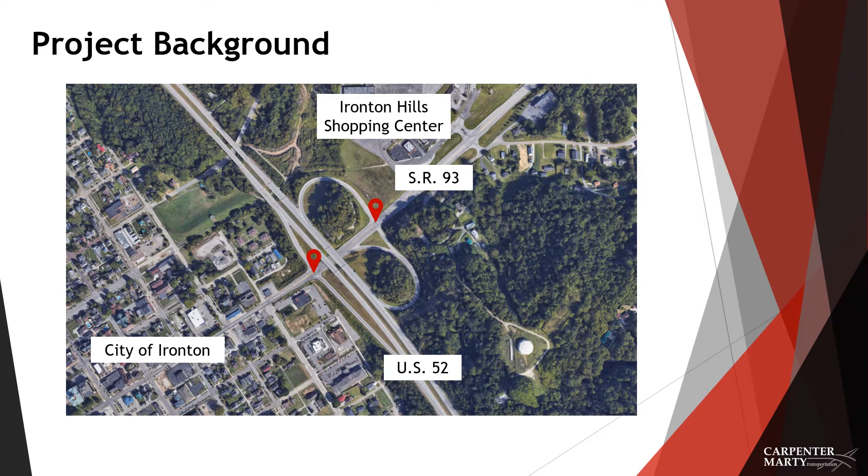Both ramp terminal intersections have experienced a high number of rear-end crashes on southbound State Route 93. The location was ranked 45th on the ODOT 2017 Highway Safety Improvement Program Suburban Intersection List and was on the 2019 Governor's Top 150 Safety Location list in the state of Ohio.

ODOT District 9 completed a safety study in 2019 to evaluate the crash trends and develop potential countermeasures to improve safety at the intersections. The short-term countermeasure was to conduct a feasibility study to analyze the viability of the medium and long-term countermeasures. The results of that feasibility study are contained herein.

The Park Avenue traffic study was developed in 2017 for the Kentucky-Ohio-West Virginia Interstate Planning Commission, KYOVA. This study area includes Park Avenue from 6th Street to the US 52 westbound ramp intersection. The purpose of this study was to improve traffic safety and operations in the corridor.

Recommended improvements included roadway resurfacing, signal timing improvements, installation of pedestrian facilities, including signal heads, push buttons, and curb ramps at traffic signals, and addition of new sidewalk on the north side of State Route 93 from 9th Street to Coreyville Road, and mast arm lane use signs at the interchange with US 52.

The traffic and safety study for US 52 and State Route 7 was developed in 2007 for KYOVA to assess mobility and safety conditions along the US 52 State Route 7 corridor through Lawrence County. Recommended improvements included upgrading existing signals and adding warning signage.

KYOVA is currently updating the 2007 study, and a US 52 State Route 7 corridor safety management plan is being developed to evaluate the current and projected needs of Lawrence County within this transportation corridor. Information about the KYOVA study will be discussed later in this presentation.

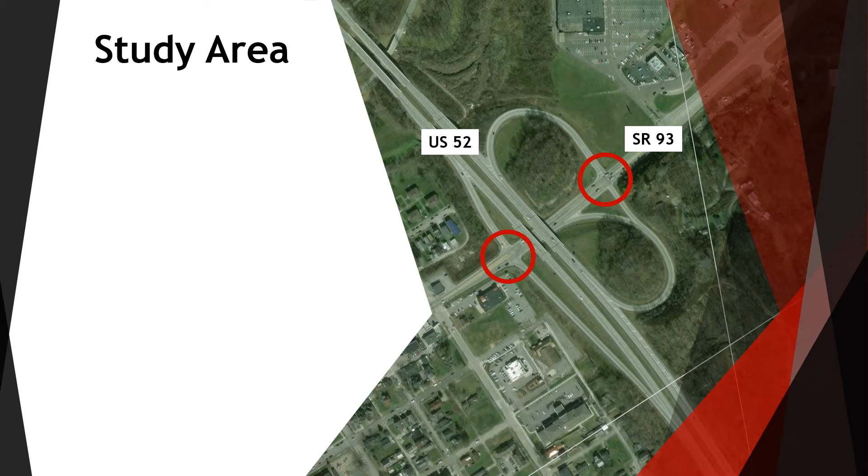Crash data between 2013 and 2017 was provided by ODOT District 9 in addition to crashes identified within the ODOT Transportation Information Mapping System. A total number of 92 crashes were identified and further narrowed down to 64 crashes within the study area. Of those crashes occurring in the study area, 21, or 33%, involved an injury. The amount of rear-end and injury crashes at this location both exceed statewide averages for similar intersections.

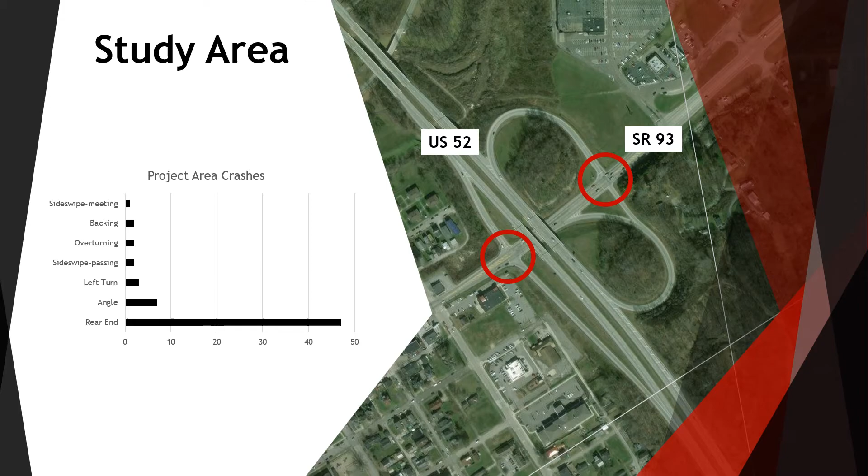The ramp terminal intersections experience rear-end crashes twice as often as statewide average, which indicates a problem. Approximately 47% of the crashes occur between 3 and 7 p.m., indicating congestion may be a contributing factor. Following too closely is the most cited contributing factor, again indicating congestion may be a problem.

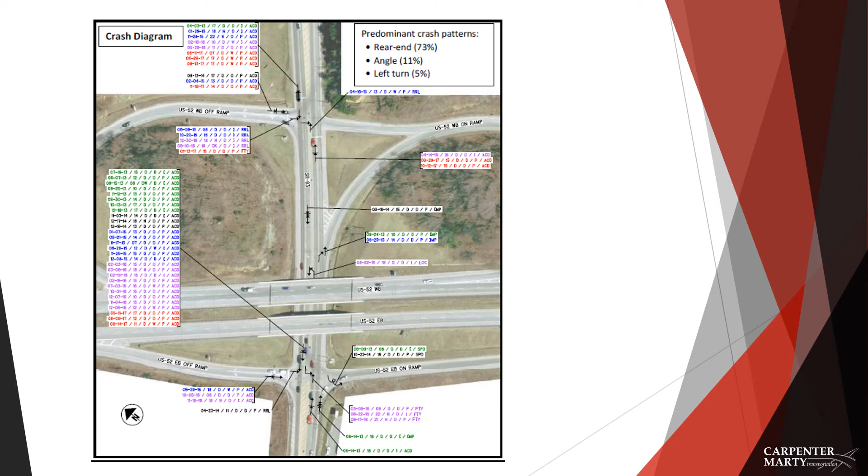The crash statistics show over 84% of the crashes occurred on dry pavement with no adverse weather conditions, which indicates weather is not a contributing factor. Almost 85% of the crashes occurred during daylight, which suggests lighting at the intersection is adequate.

The purpose of this project is to further evaluate the feasibility of the medium and long-term countermeasures identified in the 2019 safety study. The study identified two alternatives. Alternative 1, identified as the medium-term countermeasure, would construct full signal upgrades at the two existing signalized ramp terminal intersections. Improvements would include mast arm configurations, signal heads with backplates, a supplemental southbound signal head at a height which can be seen from the north side of the overhead bridges, and optimization of signal timing, coordination, and detection.

Alternative 2 represents the long-term countermeasure and consists of converting the two signalized intersections into single-lane roundabouts. The safety study identified the use of roundabouts as a feasible option to improve safety and operational service at the intersections, but recommended further investigation to more accurately determine the impacts and costs, especially for the eastbound or southerly intersection, due to the proximity of the steeply graded slopes on the south side of the roadway.

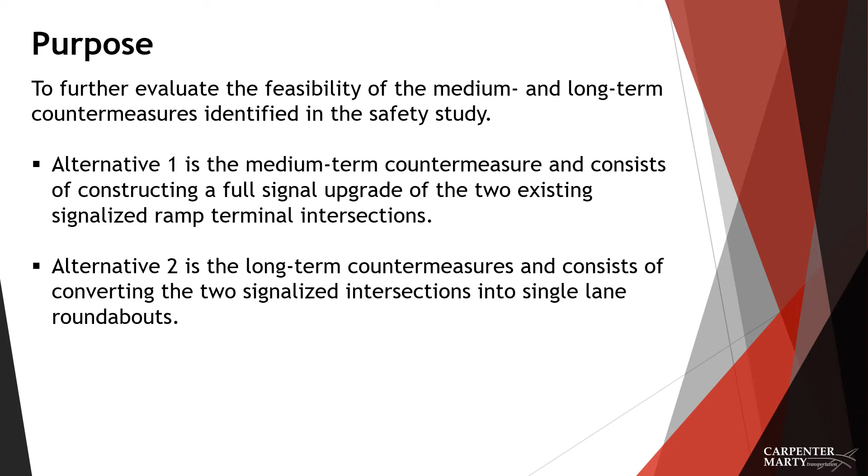To begin our analysis, AM and PM peak turning movement counts were analyzed for both intersections. Count data was collected in August of 2018. AM and PM existing year 2018 and design year 2038 volumes were used for all traffic analysis. The district provided the linear annual growth rates to project the 2018 data to 2038 volumes. The design year 2038 volumes are expected to be conservative since the population of Ironton has been decreasing since 1950.

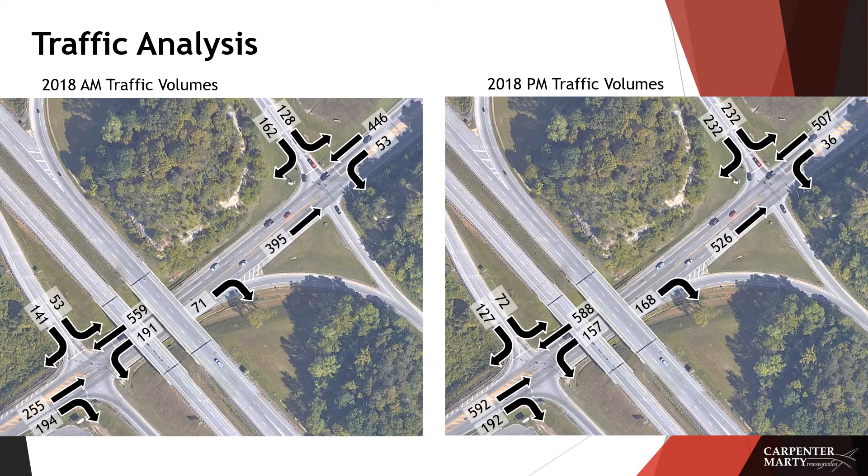The City of Ironton discussed the possibility of a large future development north of the existing interchange. No specific details or traffic impact studies are currently available. For this reason, site traffic was not included in any analysis.

Our project team completed a traffic capacity analysis for the existing conditions as well as both proposed conditions, alternatives 1 and 2. Specialized traffic software was used for all three conditions. The numbers in the chart indicate the expected period of delay for the average vehicle measured in seconds.

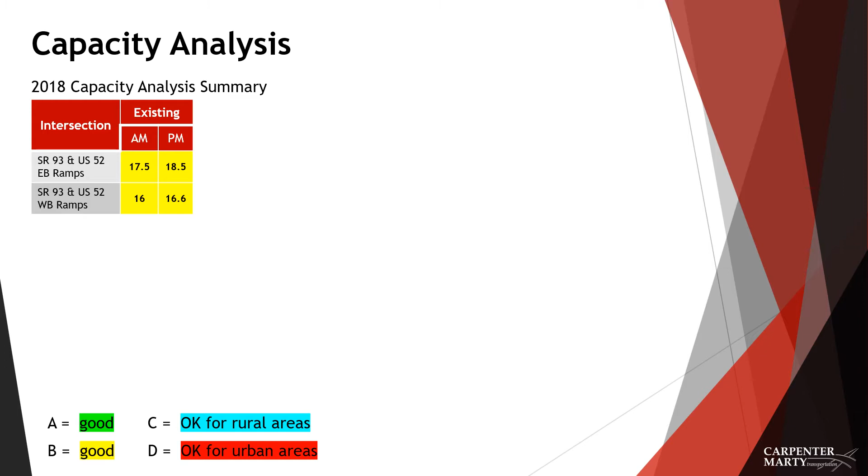The 2018 capacity analysis summary, identified as the existing year, indicates for all AM and PM peak periods the existing intersection and those for alternative 1, which would provide traffic signal upgrades, perform at a level of service B, which is considered good or acceptable. For alternative 2, which would construct the roundabouts, the intersection delays decrease.

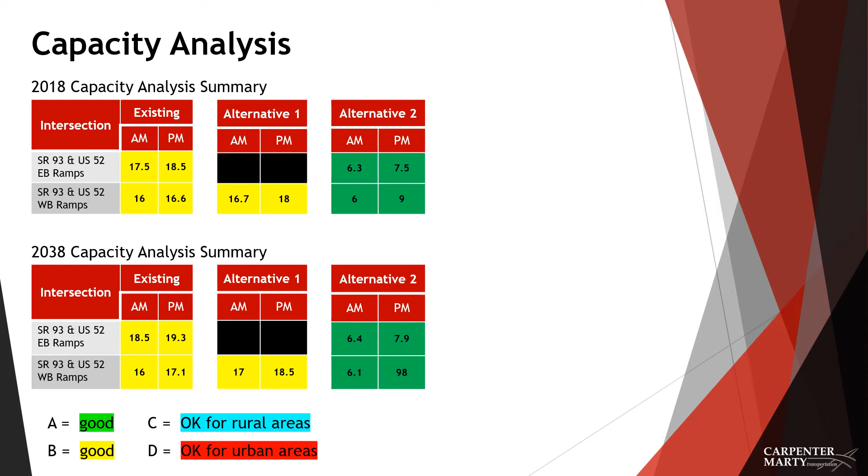The 2038 capacity analysis summary, identified as the horizon or design year, still indicates the existing and alternative 1 configurations function at an acceptable or good level. Alternative 2 shows a decrease in delay for the 2038 analysis.

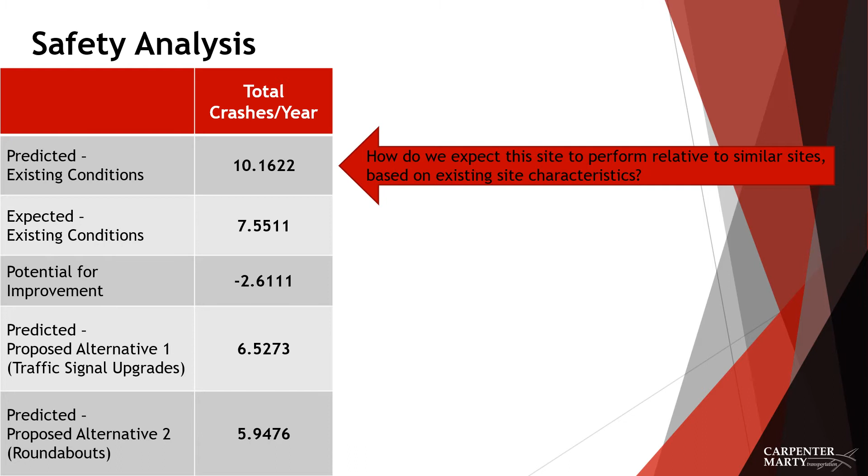Using industry standards, our team reviewed the different alternatives to determine the potential for safety improvements. The existing conditions' predicted crashes show how we would expect the site to perform relative to similar sites, based on existing site characteristics. The existing conditions' expected crashes shows how we expect the site to perform based on actual crash history. Then, we determined if there is a potential for improvement by determining the difference between the expected and predicted crashes. Since predicted crashes is greater than expected crashes, this indicates this site experiences fewer crashes compared to its peers.

This is then compared to the proposed alternatives to determine how those projects will compare to the existing conditions. Both projects will result in fewer crashes compared to existing conditions. Alternative 2, which is the roundabouts, will result in fewer crashes compared to alternative 1, which is the traffic signal upgrades. This is seen across the transportation industry, as roundabouts, in addition to having lower approach speeds, have fewer conflict points than traditional intersections.

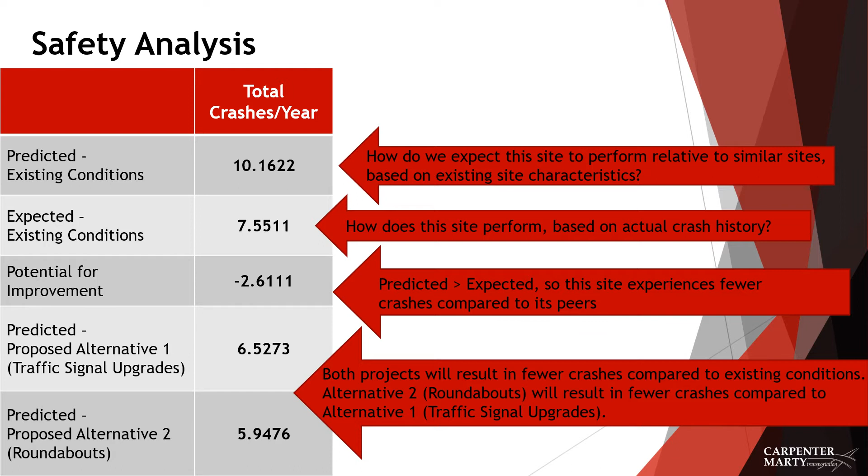Once our team determined that alternative 2 was a feasible solution in terms of safety improvements, we investigated the challenges with the design and ultimately the construction and operation of roundabouts at these locations. The first thing we reviewed was the conceptual layout of the two roundabouts. This was done in accordance with ODOT design recommendations. The roundabouts are designed to accommodate standard tractor-trailer semi-trucks.

The first issue we identified is the roundabouts are constrained by the steep rock slopes at the northern corners of the north roundabout and the steep fill slopes adjacent to the south side of the eastbound ramps at the southern roundabout. If the rock slopes are impacted, construction costs will increase significantly. Impacts to these areas are to be avoided and help to define the footprint of the proposed improvements.

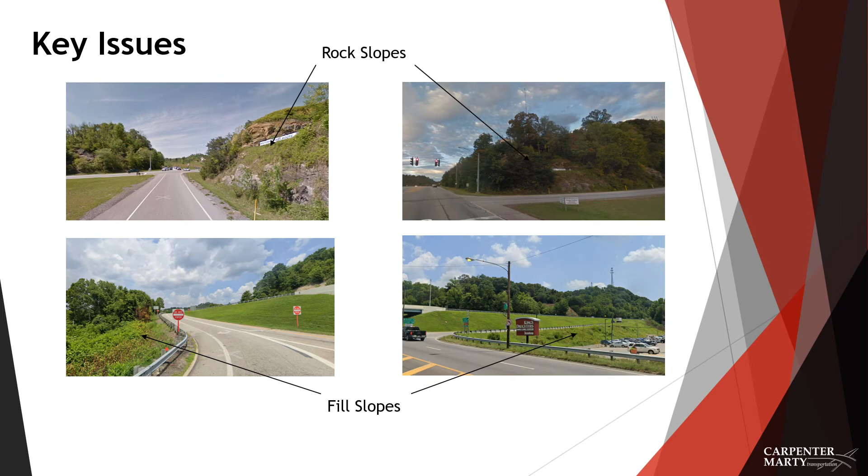The next issue identified was the intersection sight distance for the eastbound US 52 exit ramp to the southern roundabout. The line of sight for a vehicle looking left onto State Route 93 can be impeded by the eastbound US 52 overhead bridge pier columns and embankment slope at the southwest corner of the bridge. The preliminary layout for the southern roundabout has been located to maximize the sight distance while minimizing impacts to the southern quadrants of this intersection.

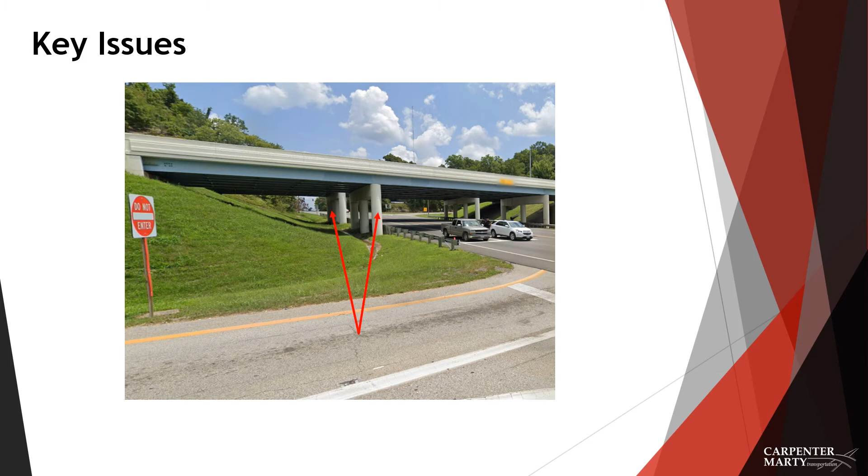The next issue identified was the existing slip ramp from northbound State Route 93 to westbound US 52. The conceptual layouts for Alternative 2 remove the existing slip ramp. The District Safety Review Team and the Ohio Highway Patrol did express concerns with the removal of this ramp during the initial review of the study. Our team has recommended the removal of the slip ramp with the installation of a roundabout for the following reasons.

The northbound movement from State Route 93 to westbound US 52 is proposed to be a typical right turn movement at the roundabout. This allows for vehicles to properly slow before entering the intersection and have appropriate entry geometry in sight of conflicting vehicles. The existing slip ramp introduces an additional unnecessary merge point between State Route 93 northbound and southbound traffic entering the ramp. The merge point does not have appropriate sight of conflicting vehicles, and drivers must look uncomfortably behind them.

If the slip ramp is removed, the additional merge point would be removed, along with the potential for crashes at this location. The capacity analysis shows the slip ramp is not required, even using the design year traffic volumes produced with conservative growth rates. Providing more capacity than is necessary can lead to vehicles operating at higher speeds. Retaining the slip ramp will likely add to post-construction confusion as users are adjusting to the new and unfamiliar roundabout operations.

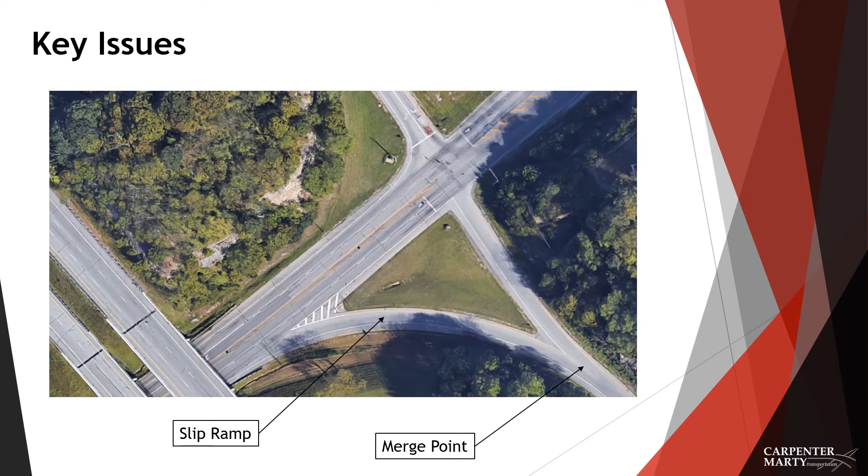The Park Avenue traffic study identified the need to increase pedestrian safety by constructing a sidewalk on the north side of Park Avenue, State Route 93, from north of 9th Street to Corryville Road. There is a need to provide pedestrian access from the city of Ironton across US 52 to the Ironton Hills Shopping Center. A 5-foot wide sidewalk has been included with the proposed improvements.

Potential future projects at the westbound US 52 State Route 93 intersection should be considered during detailed design efforts. The 2007 Traffic and Safety Study for US 52 and State Route 7 included a countermeasure to convert the existing partial cloverleaf interchange to a diamond configuration and create a new service road between State Route 93 and Little Storms Creek Road, County Road 22. A large potential future development north of the interchange is anticipated to connect to the new service road and interchange.

Our team did review crashes on the US 52 westbound exit loop ramp and weave area. While there were a number of crashes between 2013 and 2020 in this area, and it is expected these crashes would be mitigated by converting the interchange to a diamond configuration, this improvement would be costly and impactful. The benefit is not expected to be greater than the associated costs.

The preliminary roundabouts are designed to accommodate future expansion, which would provide a dedicated through lane and dedicated right turn lane for the northbound State Route 93 approach to the intersection with eastbound US 52 ramps. The design would also accommodate a dedicated left turn lane and a dedicated right turn lane at the westbound US 52 exit ramp approach to the intersection with State Route 93.

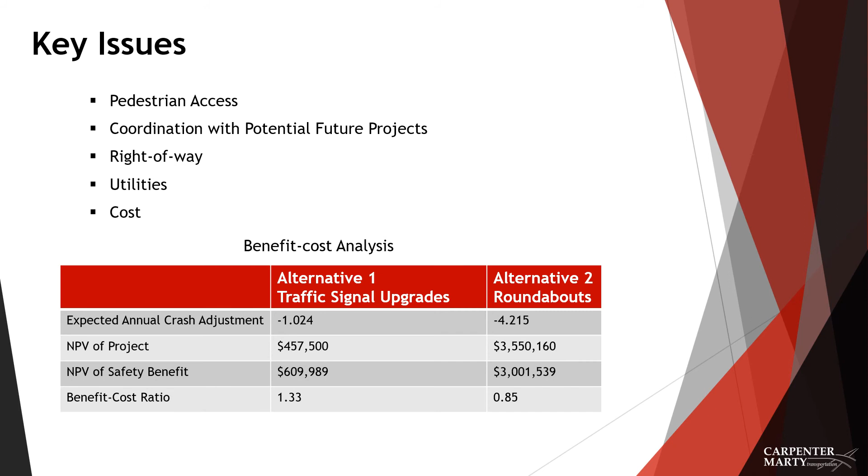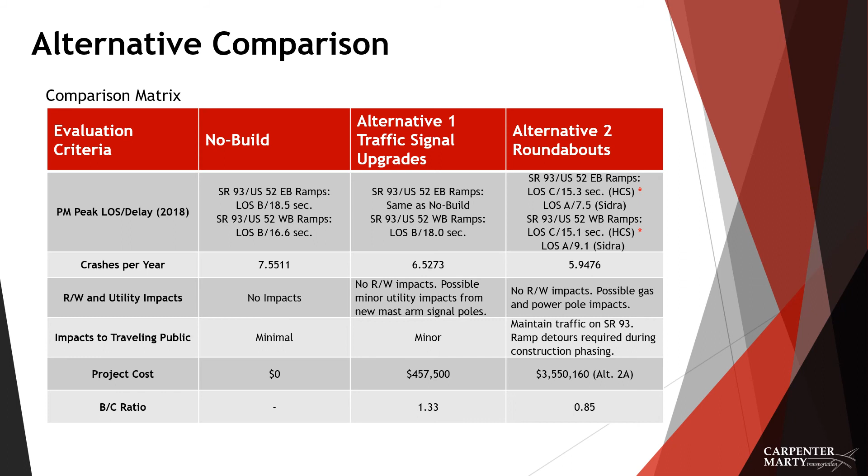The further evaluation of the feasibility of the long-term countermeasure identified in the 2019 safety study shows the necessary size and cost of the proposed roundabouts are not as large or impactful as previously assumed. The benefit-cost analysis shows Alternative 2 is expected to reduce crashes by 4.215 annually, whereas Alternative 1 is expected to reduce crashes by 1.024 annually. While the cost of Alternative 2 is greater than Alternative 1, the benefit of reduced crashes, including the reduction in severity of crashes, is also greater for Alternative 2. Our team recommended safety funding be pursued for Alternative 2, which was subsequently approved by ODOT Central Office.

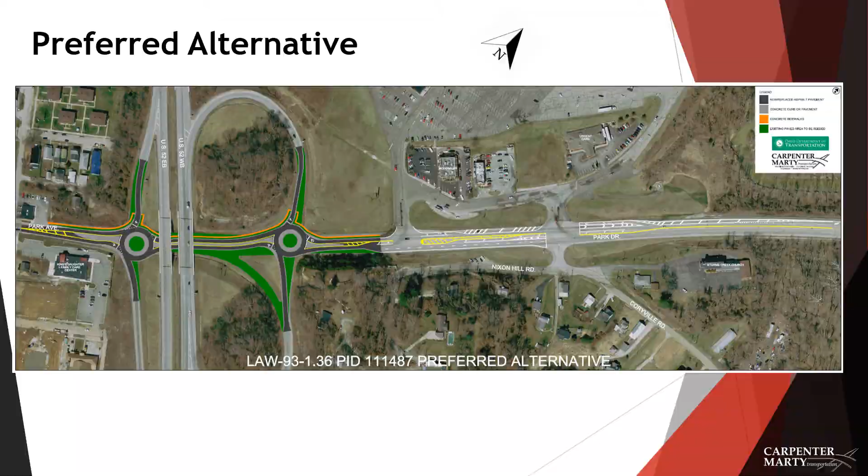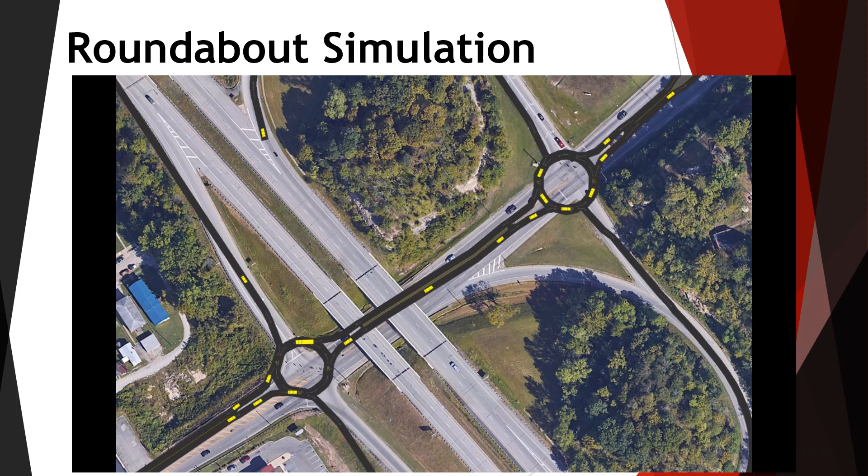The tentative project schedule, moving forward, is to begin design in the spring of 2021, with final design being completed in early 2022. The project will be bid and awarded in the fall of 2022, and the current estimate is for construction to begin in the spring of 2023 and to be completed by the fall of 2023.